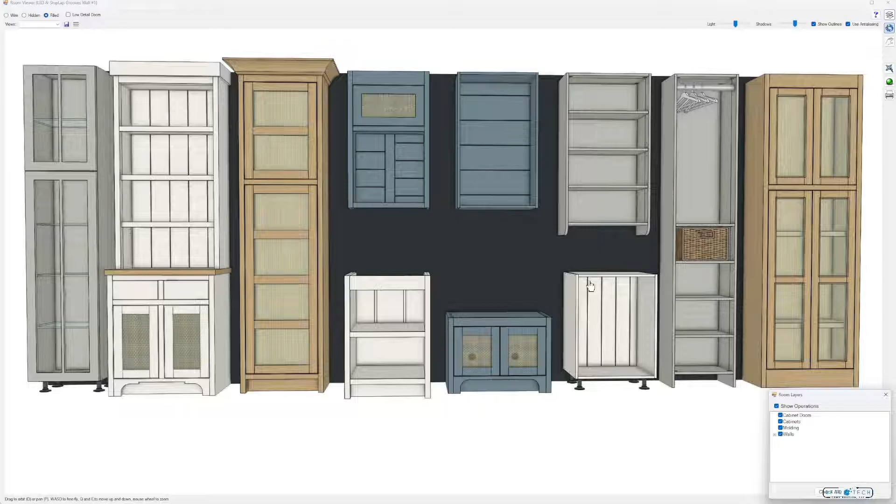So after downloading it, you want to make a copy of it and you'll want to save it into your insert library. So retro LED and Shiplap, and here you'll be. It's a pretty extensive library covering most situations you'll come across. This library is essentially broken into two categories. FF is face frame and the bottom FL will be the frameless.

So let's say you want to put a LED light in the side of a frameless wall cabinet. Let's say you want to do both sides, frameless wall LED sides. This picture is a little bit tough to see, but if you go to the wall LED right, there's your right side and your left side. The grooves in this library have dado logic applied.

So whatever the width of the down shear bit is, it'll go past that a half of the diameter. So if it's a 1/2 inch down shear making your groove, it'll go past a 1/4 inch. So it's not just going to butt in and leave a round edge for your shiplap and your LED lights. And I would recommend test fitting, maybe do a test cabinet.

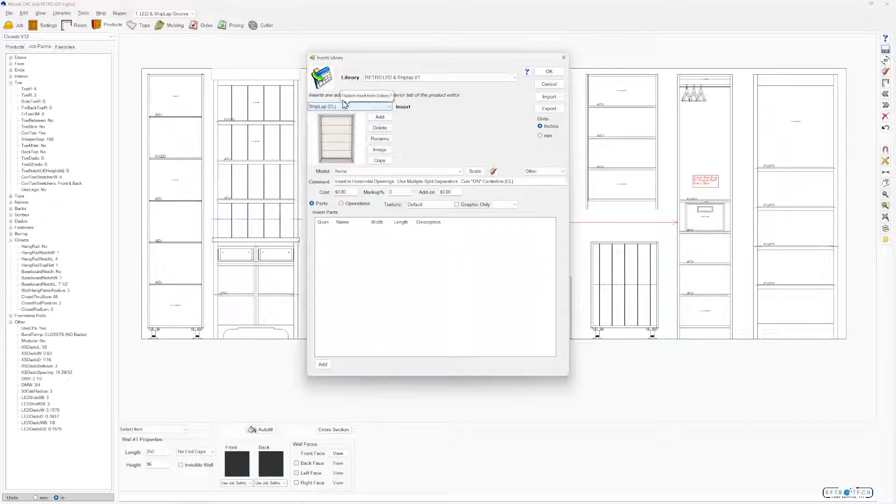Another point I want to get across right away is the use of separators for these inserts and how they're used. So this Shiplap CL would stand for Shiplap center line. To create this look, if you go into your interior, this top right box, it's a section split. So you can split it as many ways as you want and go down to a separator.

If I divide this into 1, 2, 3, 4, 5 sections and add this insert, it'll stick the insert to the center of that separator for this center line. And that's on a formula, so that is the exact center. If you go to the mid, it's going to go and put that operation in the middle of the separator. So essentially, it'll leave the ends with a 1/2 of a space for the shiplap mid.

That's also the same for the verticals. So the verticals are basically like a nickel gap back. The mid would have a 1/2 space, whereas the center line would have a full space. A couple more things here.

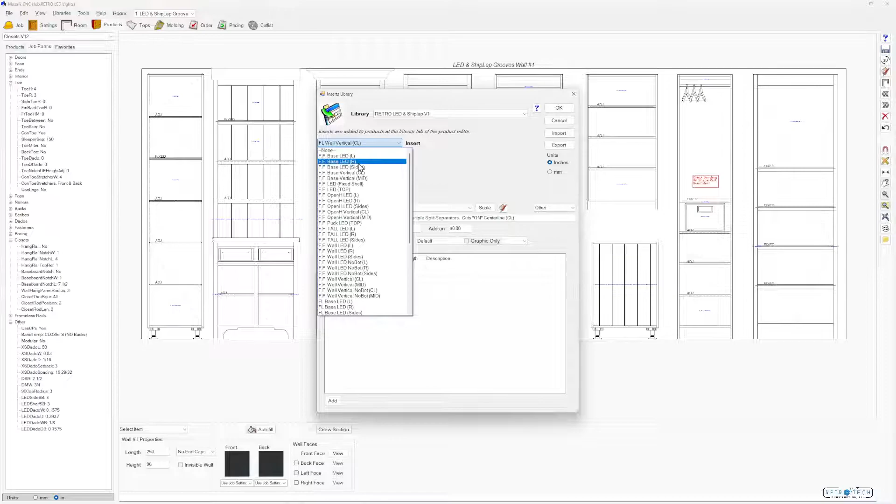So here's a face frame base right. There's a comment for all these. It says insert in bottom right opening. If you go to a sides, insert in bottom opening, it cuts both left and right grooves. In general, everything will essentially be put in on the bottom and left. Most things are working from the left to the right and from the bottom to the top. So that's just something to keep in mind.

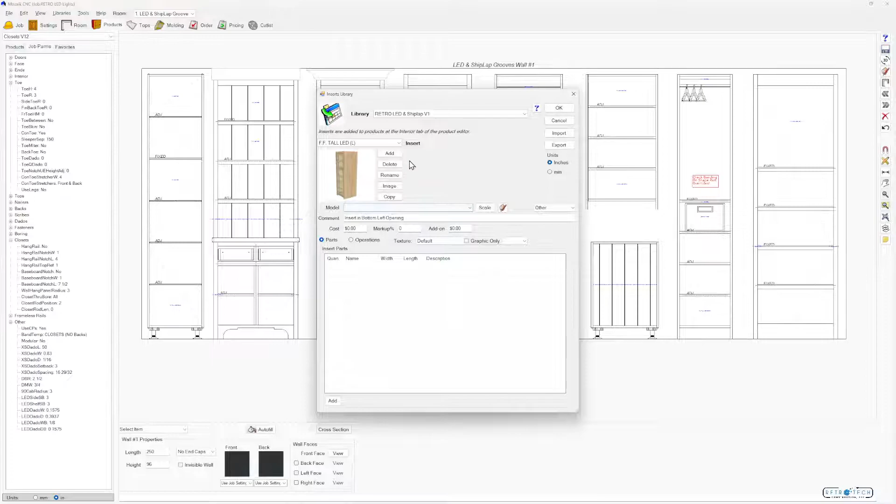The open height ones, it'll cut just the opening height. It won't cut the whole cabinet height. There's a frameless puck light. That'll be centered. LED fixed shelves. This does not work for the adjustable shelves.

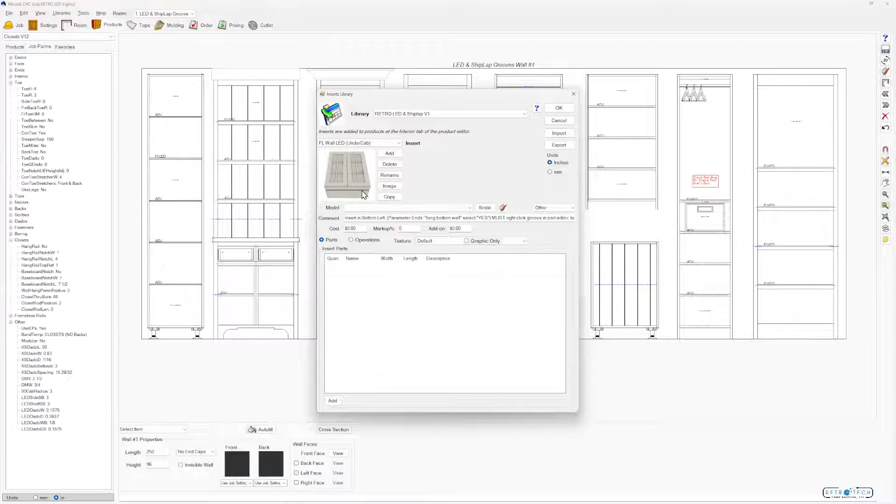LED top. One more quick thing I'll mention is you can use this insert to make the operation on the outside of the cabinet. I don't recommend doing it, but add the insert, go into your part, right click on the groove, and then it'll say move to opposite face.

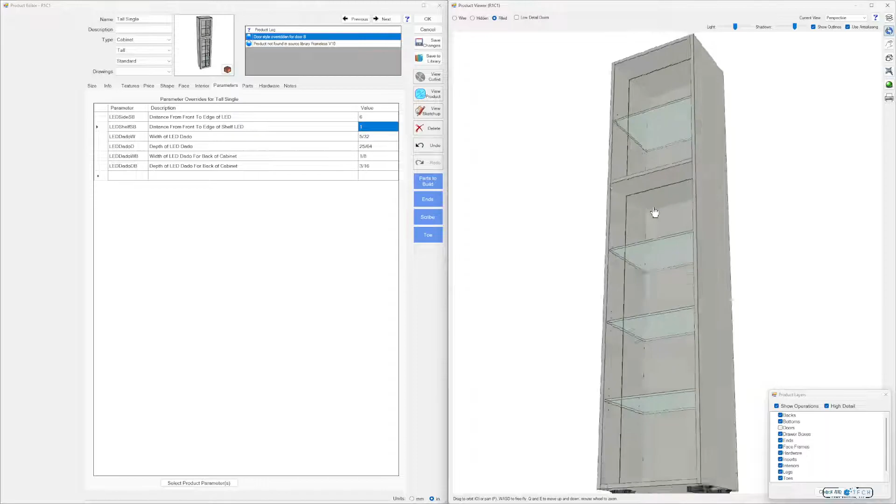So let's see how this thing works and how it's parametric. So here's a tall cabinet, frameless, that's got grooves in the sides, top, fixed shelf. And what if I want to change this from a 3-inch setback to let's just say 6? Everything moves. Pretty sweet.

Here I'm in my frameless blind dado construction method. And to make this work, you'll need to add these 6 parameters. The important part is filling this part in. The description doesn't matter so much. So how you do that is go down to add. And from there, you're just going to write in these names. So LED side setback.

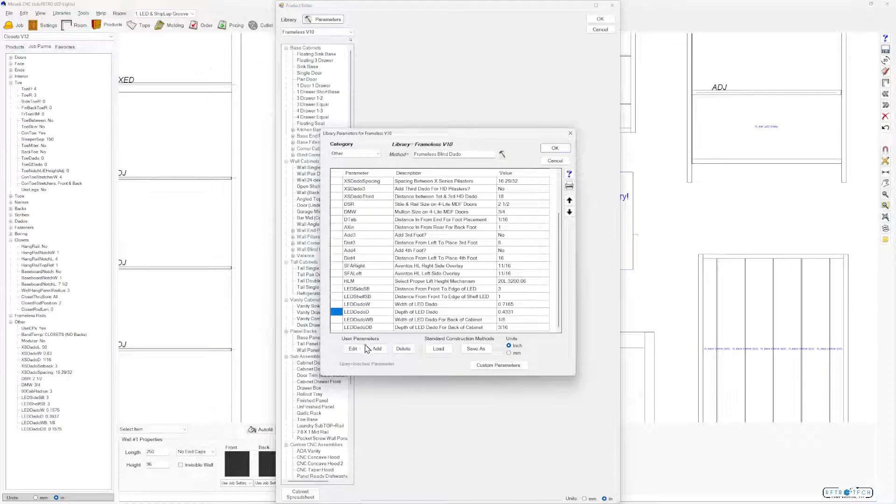Once you fill those in, press save as. It'll ask you to save it. Yes. And then you can just overwrite the same construction method that you just were using. And don't worry, you can edit these or delete these if you make a mistake. So don't worry about that too much.

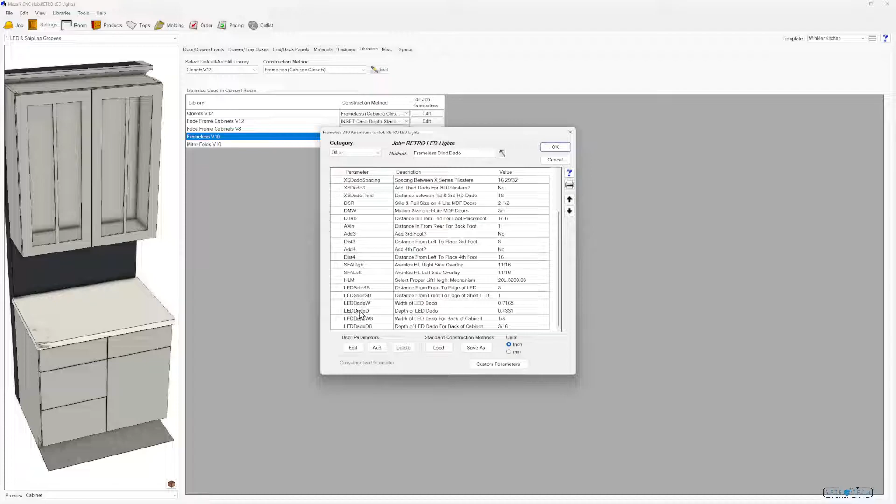So then you would ideally start a new job with that construction method, and those would all be in your other category. You could also go to your settings in a current job, go to your libraries. You could go to that construction method you just modified and go to edit job parameters, and from there it'll show these here once you load them. So you'd have to go load and then grab that frameless blind dado and open that up. That would show up there then.

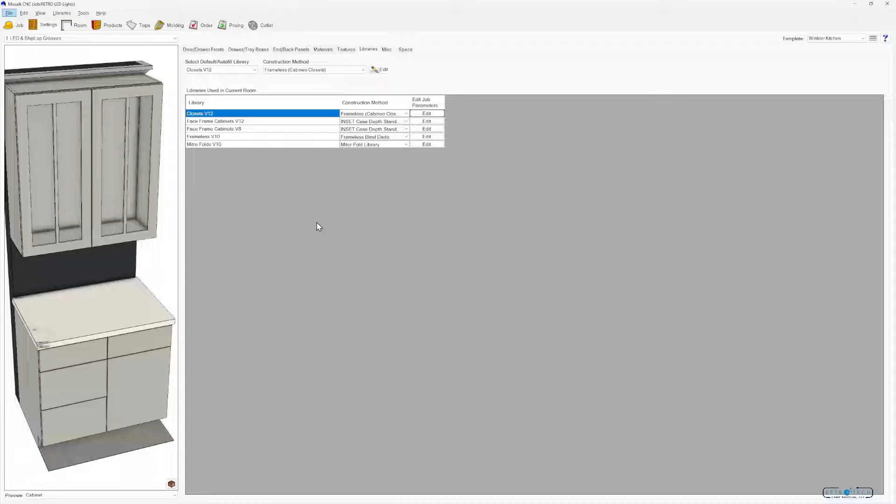This part can always be a little bit of a mystery with what are you loading and what is current, but edit and load and that'll pull that in. So that's how that works. Show you how to copy this. Let's say you have your frameless V10 library changed and you want the frameless V12 with the same user parameters.

You can go into your frameless V12 and it won't have these yet because you haven't added them to this library. But if you want to use the same method, you can go ahead and just press load and then go to your frameless blind dado and open. And it'll say overwrite current parameters. You say yes, and it'll bring in the one you just saved from your V10 library. So that's how simple that is, to just kind of copy it among libraries.

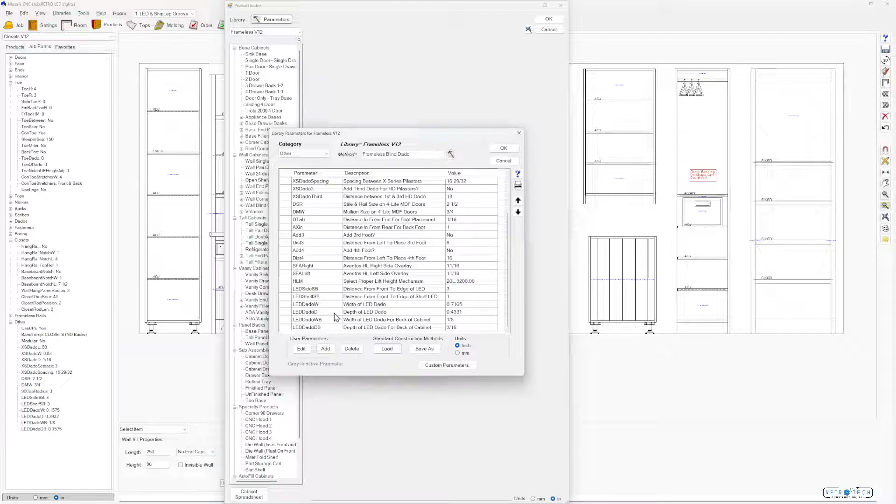So here's a tall cabinet that I have a groove in the top. So that's an open height. What if I don't want the top? I want the whole cabinet. Let's clear that. Go to our inserts. And I'm in my face frame cabinets here and a tall. So let's go to FF, go down to tall. Let's go sides. We'll drag that in, the bottom. Let's go all the way up to the top. So let's say I don't want that.

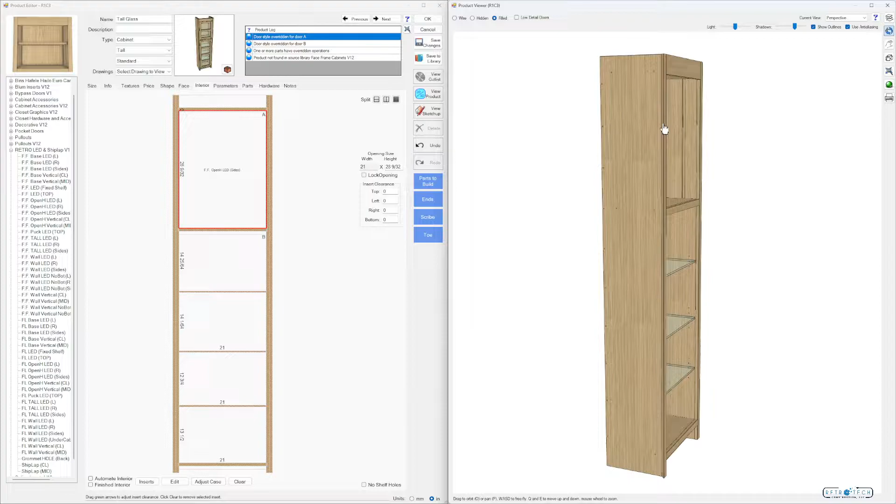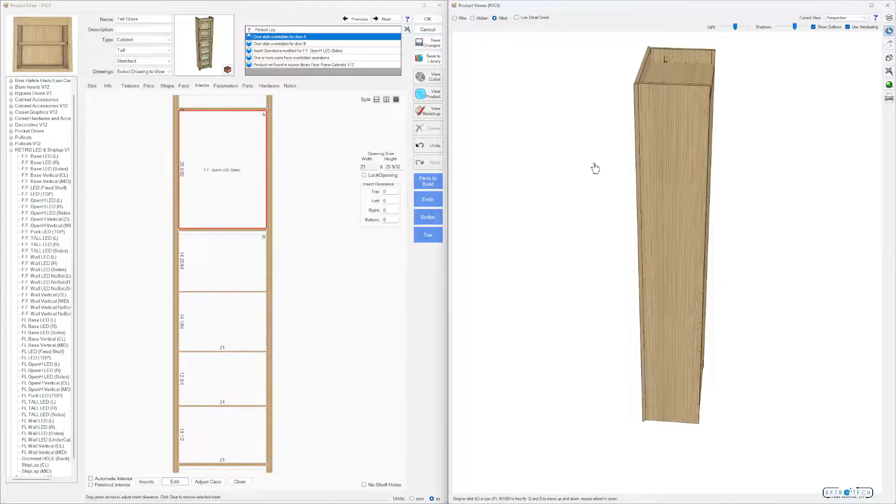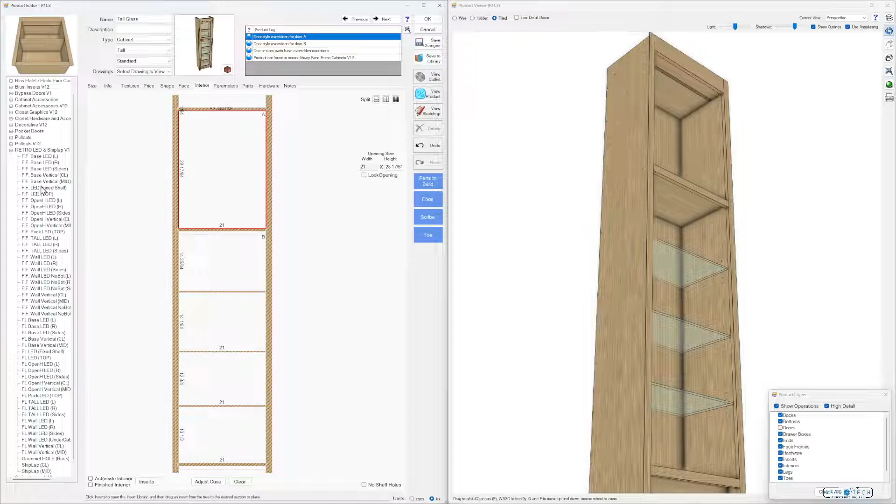Now what if I need a groove in the top and the sides? What do I do here? Well, that's the beauty of Mozaik and using separators. So let's clear this opening again. What we'll do for this, there's probably a couple ways you could do it, but we'll just split this for now, make it a separator. Here we'll open our library again. We'll go to face frame and we'll go to LED top, drag that in. There you go. What we'll do here now is you can make this top, and then now we'll go to our sides and I can just add the same thing we did before. We'll go to our face frame, open height, sides. Now we got the best of both worlds.

One little side tip here is these glass shelves. If you don't know how to add glass shelves, go to your shelf and you can see here it says adjustable shelf, 3/8 glass. Go to edit, it says glass here. So I already changed this, but let me go back and I'm going to rebuild this shelf. Go down to rebuild. There it's my regular rift white oak. Let's go to edit, go to part type, glass. And as long as you have that material set as a glass, that'll pull up as glass.

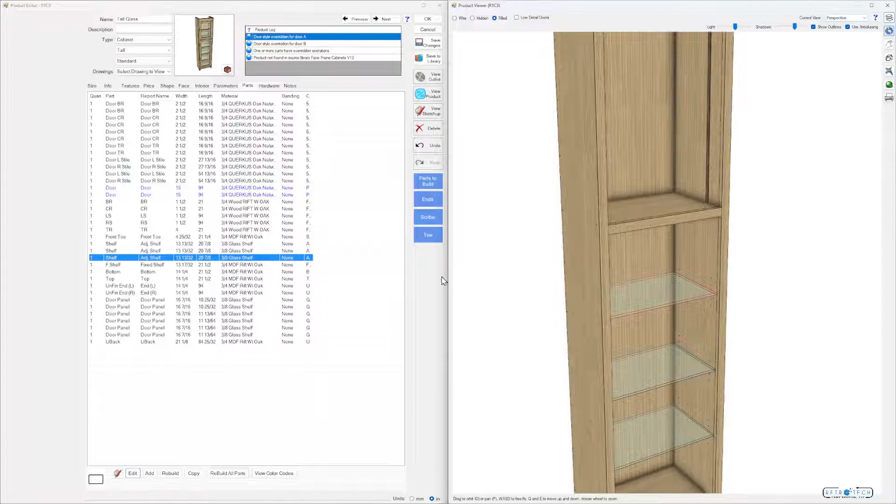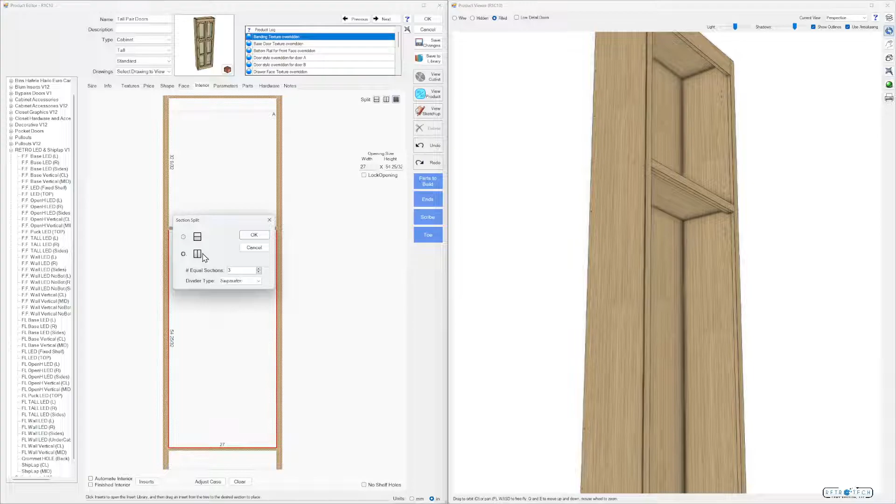So let's look at how we'd add LED side lights to this cabinet in the lower section and a puck light in the top. Let's clear this out. I have to go to my open height first. And before I can do that, I have to split this. So what I'll do is split this in 3 ways. Vertically, the separator. And now what we can do is go to face frame, open height, because I want to get this opening height with a groove, and we'll go left and drag that in. Do the same thing on the right side, drag that in.

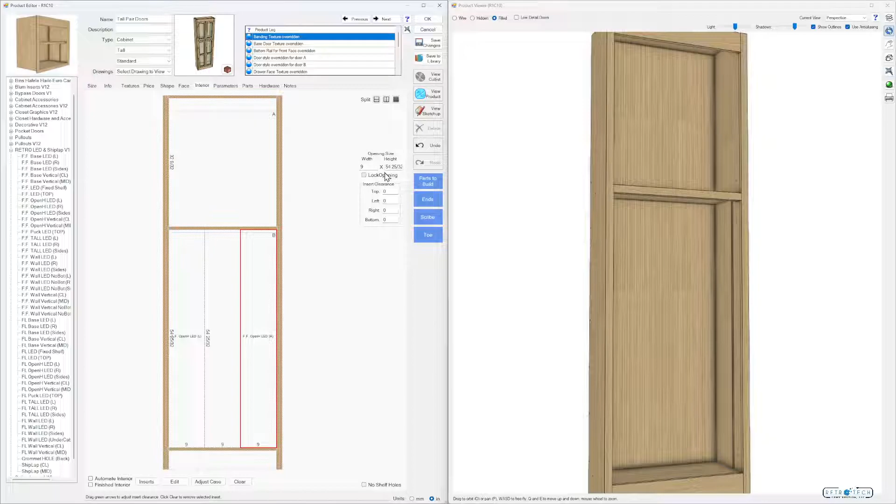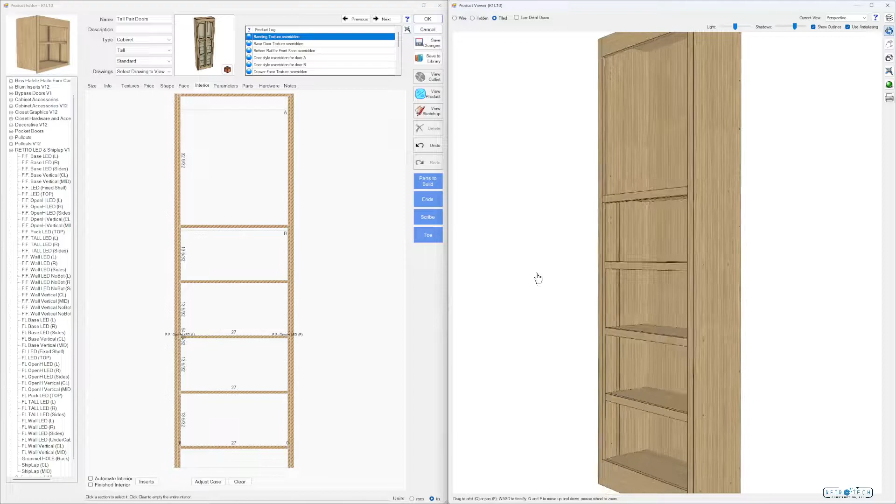Now we're just going to squish those to 0. There you go. Now we'll add our shelves again. There you go. Still parametric. Can make these adjustable shelves. Still works. And then the top, we can just simply add a puck light. Go to face frame, drag that in.

Puck lights are a little different. They require a few manual edits, but pretty simple. Check your diameter here. It's already going to be centered, and the inset's going to be centered in the inside of the cabinet.

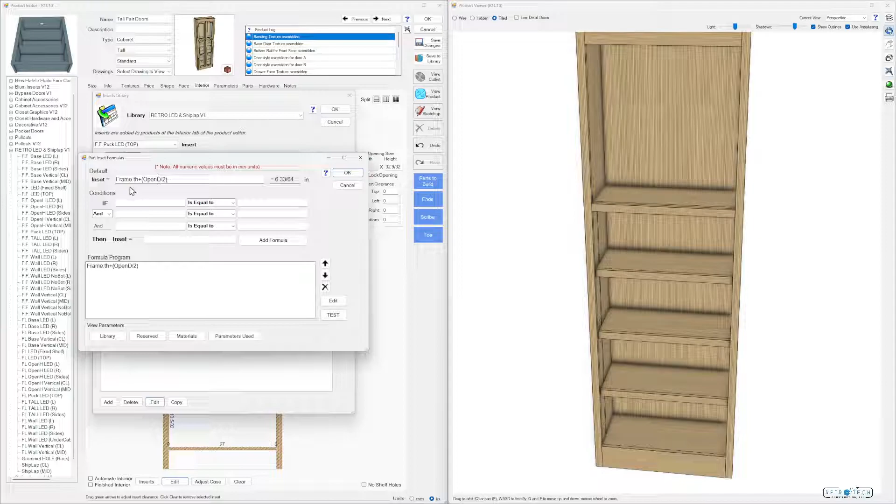So how do I get grooves in a base cabinet like this with the middle partition, or even two grooves? Let's figure it out. And for this, I'm just going to run a partition in the middle and lock it to center.

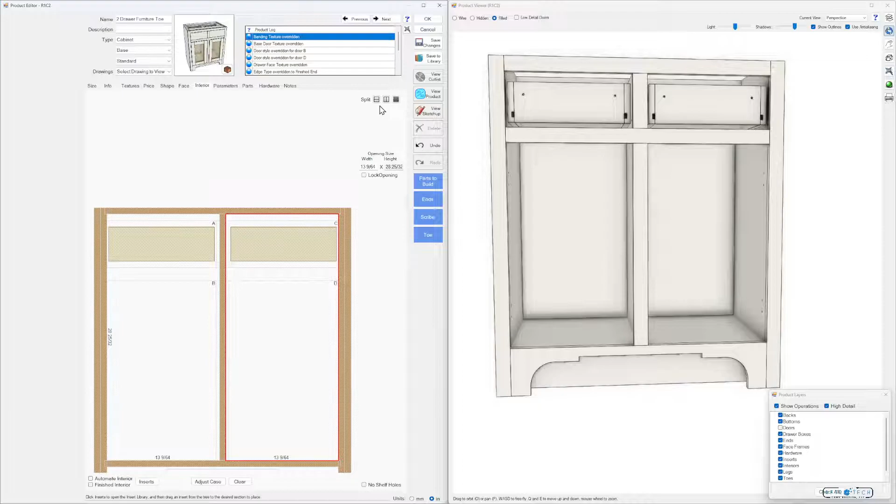And I'm going to add a stretcher, lock it to the center. Could be a separator if you want. There we go. So now, let's just say I put a shelf in there. I could do a couple things here. I could add an insert, face frame, base. Let's just try this once.

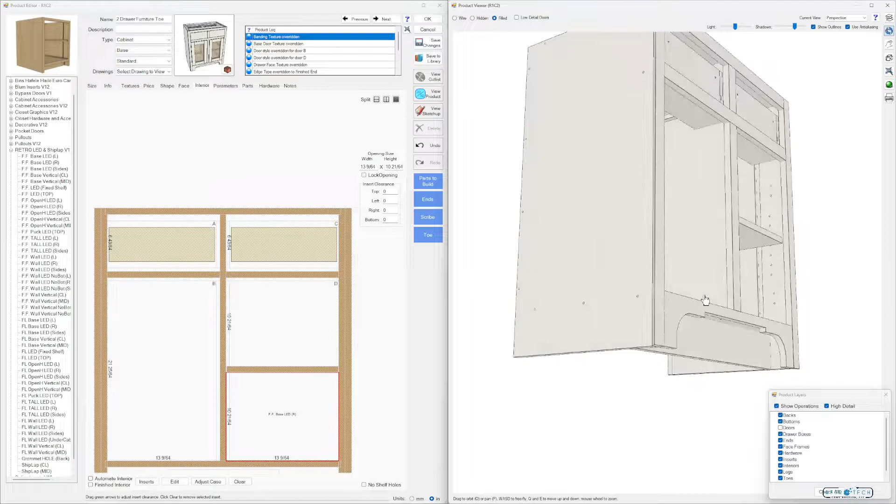I'll show you. That one will go all the way to the top. So if I drag that in, it'll go up through all the way to the top. It might be fine, but let's try something different. I can't do an opening height here because it'll stop at the shelf. So let's delete the shelf.

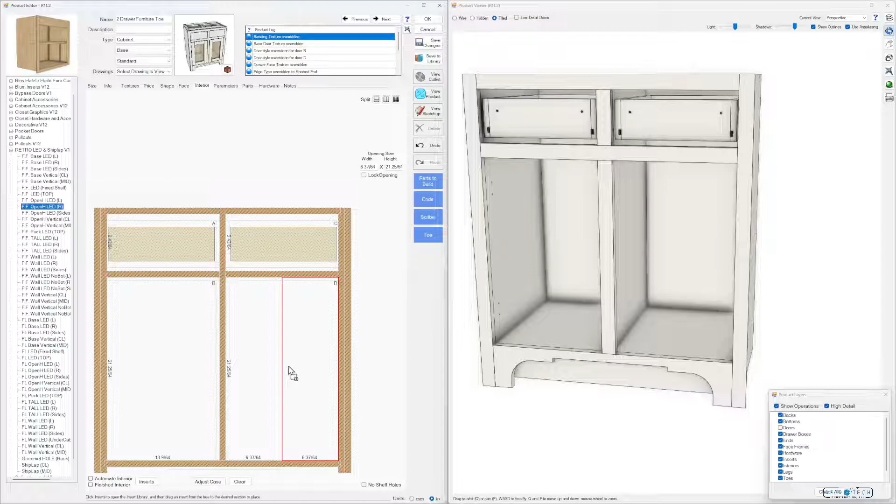What we'll do here is we'll split this again. Separator. Now we'll add our face frame open height LED right. See what we're doing there? Let's go to the top of that opening and stop. Then again, we'll just go ahead and make this width 0. Still there. And now we got our shelf. That's all you got to do.

Putting grooves in cabinet backs is so fun now. It's so easy. So let's take a look at how we do it here. Here's a frameless base. So we're going down to FL, base, and I got vertical centerline, or I got vertical mid. And in this cabinet now I have vertical mid, which means the actual operations are going in the middle of the openings. So you can see the separator is right here, but the groove is here.

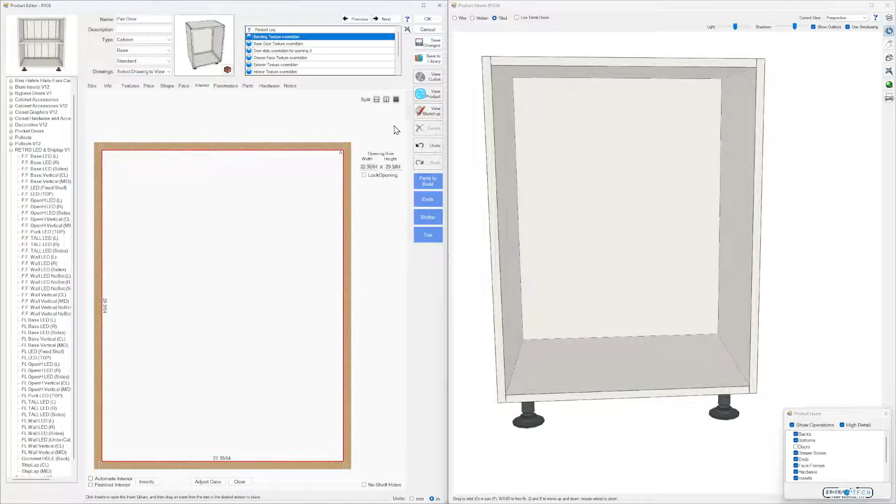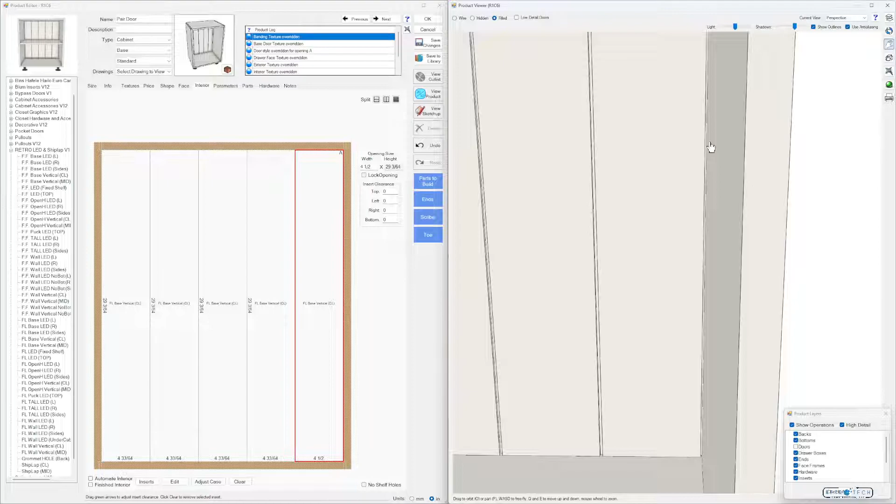So let's clear this and just do it again. Let's try the center line. Just going to go right in the center of that line. Drag it to the left side and drop it in. And there, that's it. I don't want to drag one in the last opening, because what would happen is I would get an operation halfway on the end of that part. So we don't need one there. So we're just going to take that one off. And that's perfect right there.

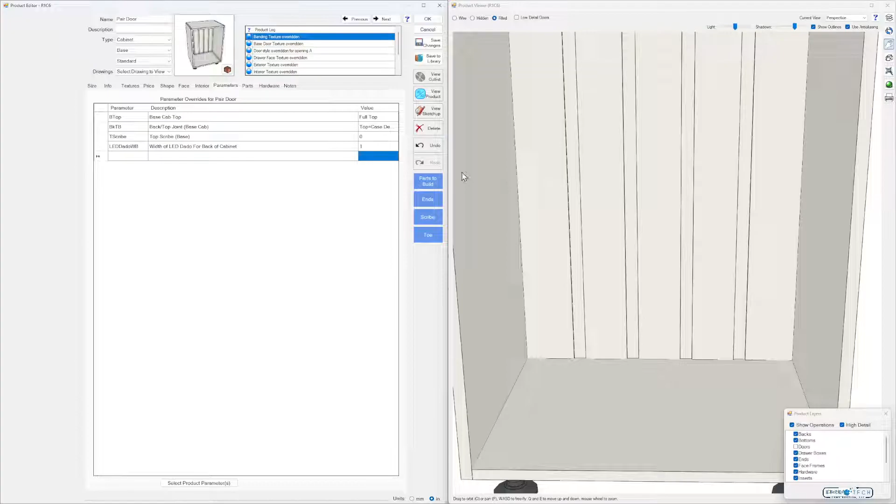So this is parametrically set up to split that line by whatever our back parameter is. So let's drag those in here. Let's just go to the back width. Let's just make it an inch. I'll show you the difference between the center line and the mid vertical. For the mid, we'll use all the openings, and that splits the last one in half. So there you go. Pretty cool.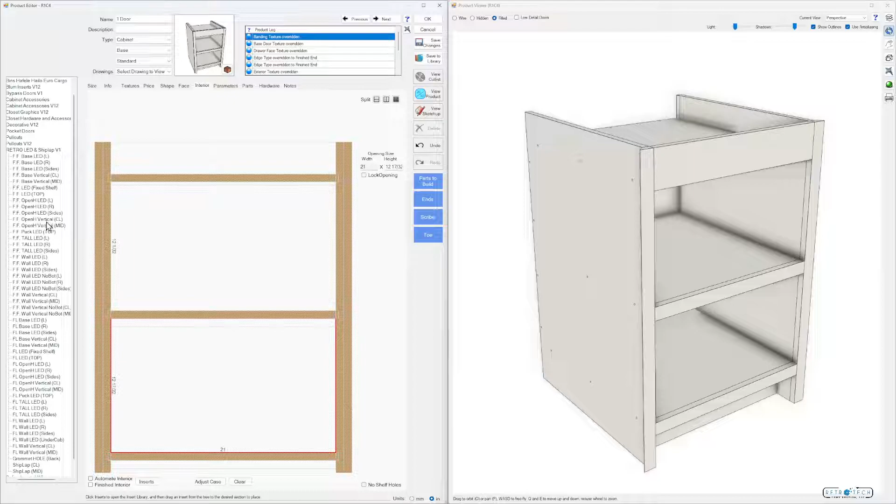Vertical, just do one, so you can see. You drop one in there, it puts a groove in the middle. Let's back up. We'll split this 3 ways just for ease, and we'll do face frame, vertical mid. There you go. Now if I take this shelf and drag it, oops, that has to go off the face.

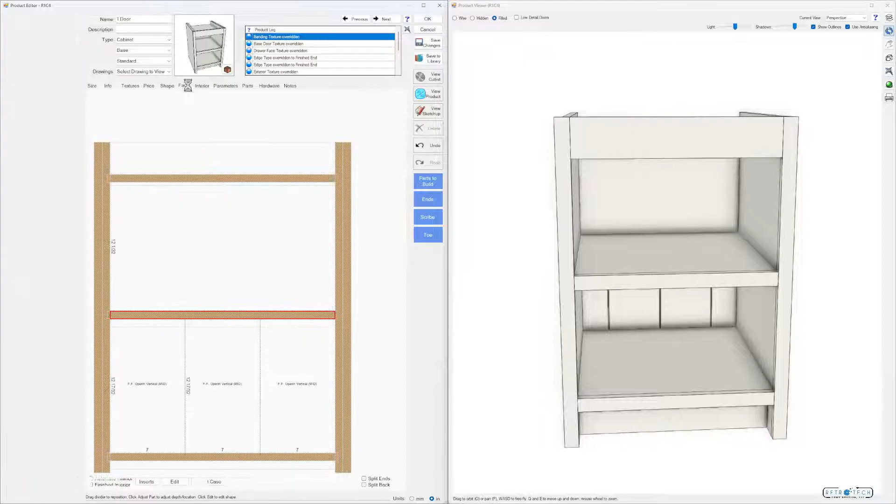That'll all move. Let's take a look at adding some horizontal grooves, or shiplap grooves. So here you go. We got the mids here. So we have 1, 2, 3, 4, 5 openings. And actually with the mids, we have 1, 2, 3, 4, 5, 6 panels. So that's one way of doing it. You could also go to the center line.

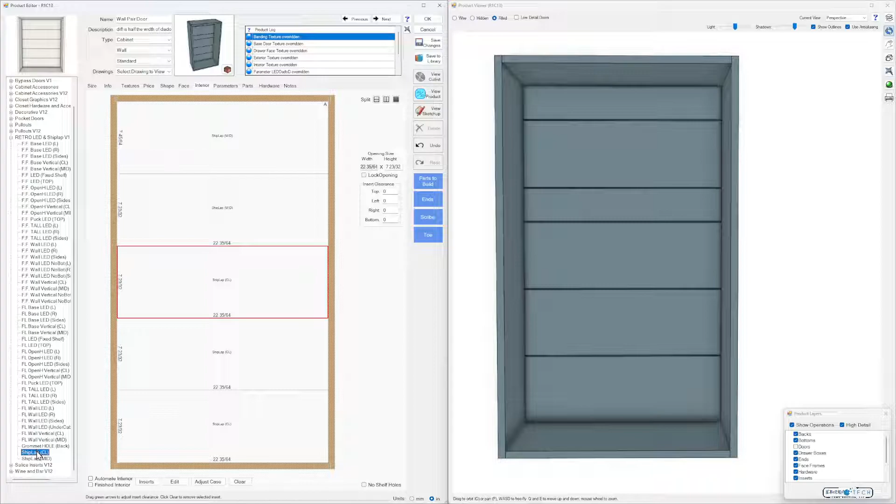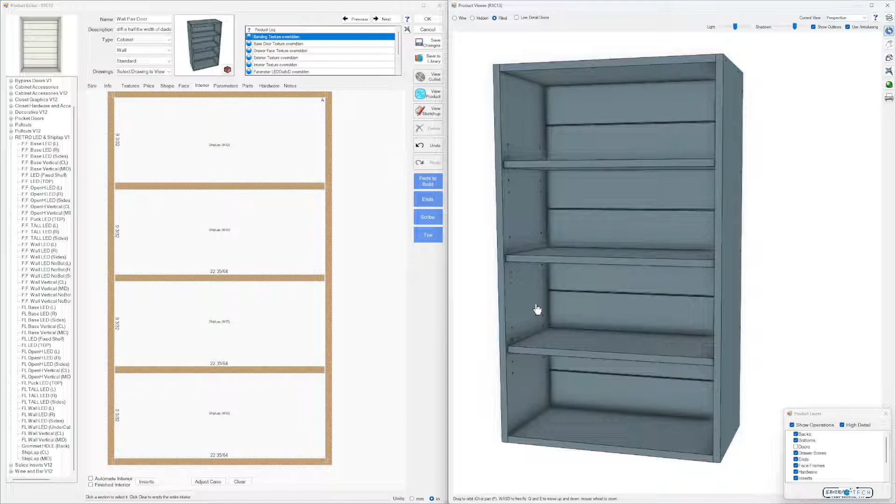And then this one, just delete it or clear it. There's the center line. Another thing we could do is we could just add some shelves. Let's do some fixed shelves. That's just splitting the opening in half. And there you go. And there, you can do the same thing for the adjustable shelves.

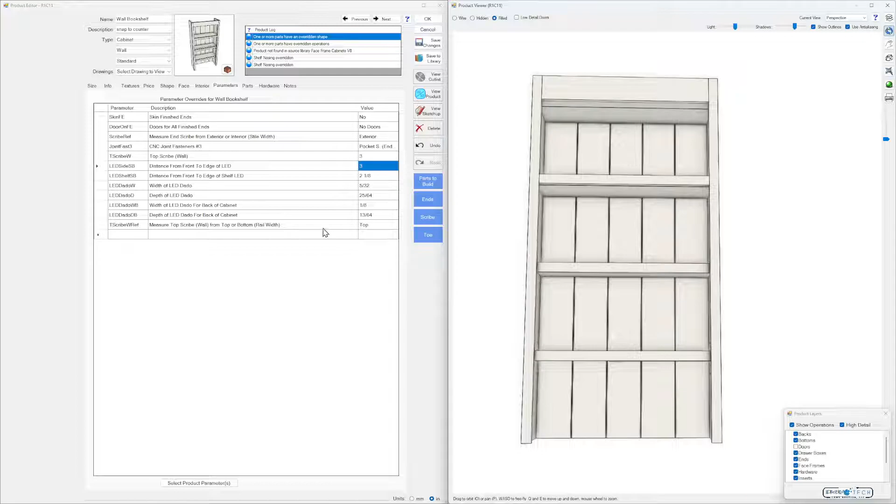So let's look at a cool wall cabinet like this that has no bottom. One thing I want to point out also is on back operations, the top scribe wall reference needs to be on the top. So you'll see here, top scribe wall, I have 3 inches. Go to 0. That's all parametric. Everything works fine. Let's go back down to 3. Everything's fine. So if I go to bottom versus top, you can see what happens here.

Otherwise your operations will be like this, or it'll be off the back of the part. So if I go to top scribe 0, it'll say off the back of the part. So you can't see it, but if you go into your parts operations, you'll see there that's not right. So just one thing to kind of keep in mind when you're working with this.

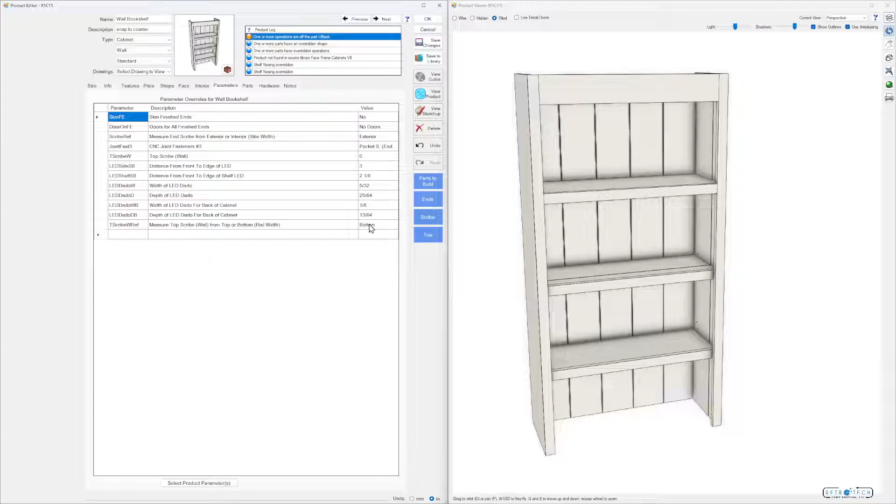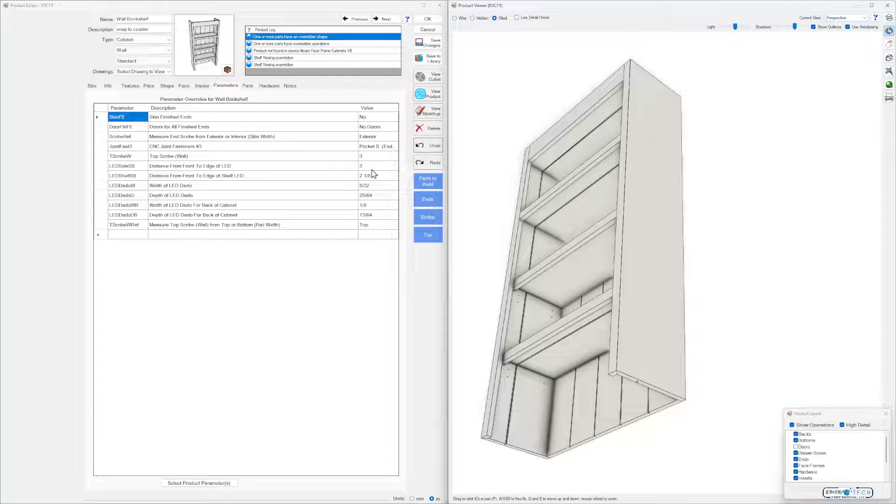So this is a pretty cool cabinet here that's got operations on the bottom of fixed shelves, adjustable shelves, the top of adjustable shelves, sides, and the back grooves. How do you do all this in one cabinet? Let's take a look at it. I'm going to change the setback here. So instead of 3, let's go to 6 so you can see everything changes except for the adjustable shelves there.

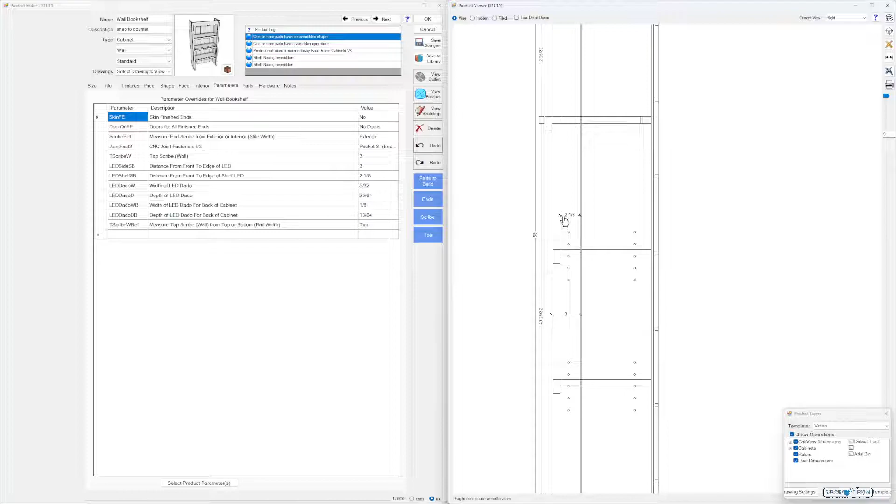So that's why I have 2 different parameters here, so we can dial that in, tweak that. So you can see there how they're lined up correctly, top groove and a bottom groove. What it's measuring from, it's 3 inches from the front of the case, and it's 2 1/8 from the front of the shelf. So this can be kind of a complicated cabinet to assemble if you're newer to Mozaik or to draw. So you can do this by deleting the bottom.

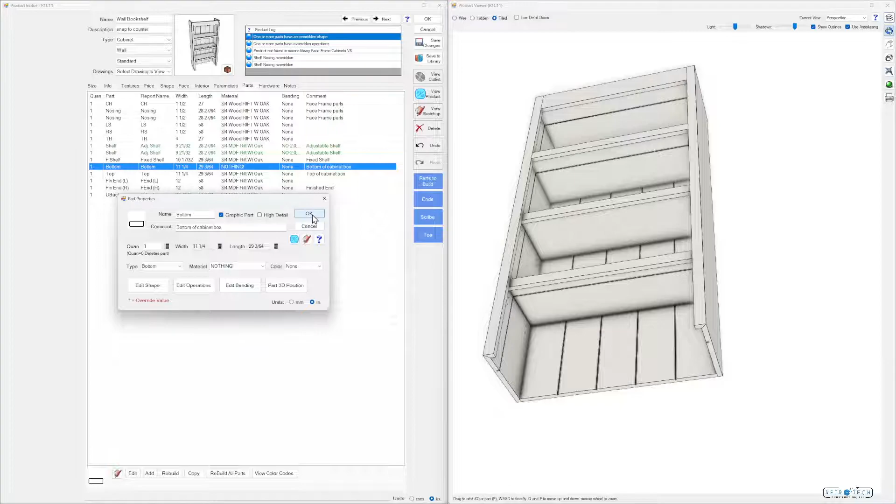Going to the bottom part and deleting this. But you can see here what I have instead is I've created a material that's nothing. It's basically a material that has 0 thickness. And I've found this works better for me for this situation. When I add my grooves, it'll go all the way to the bottom.

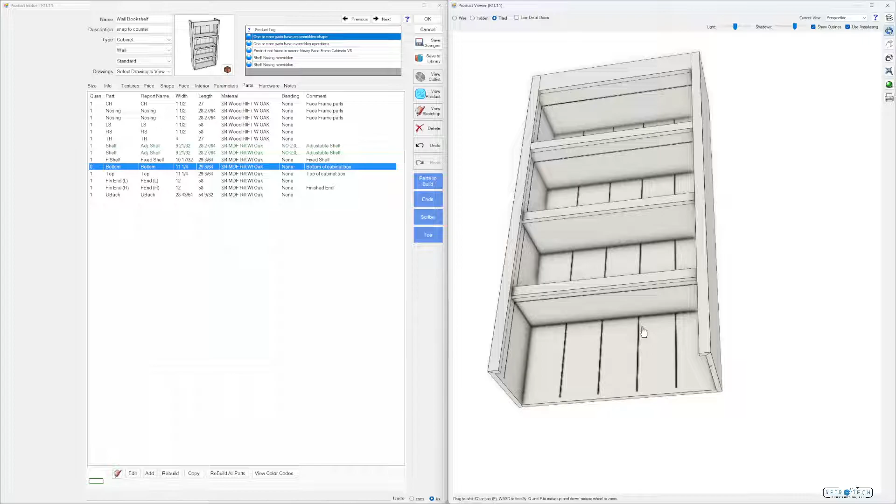If I have a regular bottom panel, let's just say I have it on there and I delete this, my grooves don't go to the bottom. I'm kind of just tricking the software into thinking that there's a bottom there, so it's taking the grooves all the way down. Another thing you might notice is I have 2 green shelves here. Well, the insert library won't stick to adjustable shelves. So those are shape overrides, which come with the download.

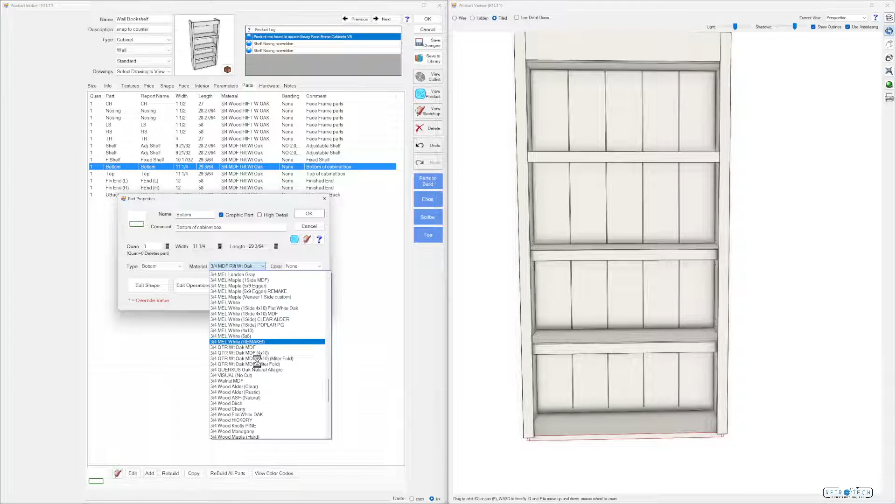Let's just rebuild all parts here, the bottom. There you go. Grab our material, that's a nothing. And that works fine. What we'll do is we'll clear this all out. All right, that's done. Let's just say I didn't want any grooves in the back. I could easily add the lights by just dragging this in. And there I have my lights on both sides. It's done. The problem with that is I now have used up my opening space with this insert.

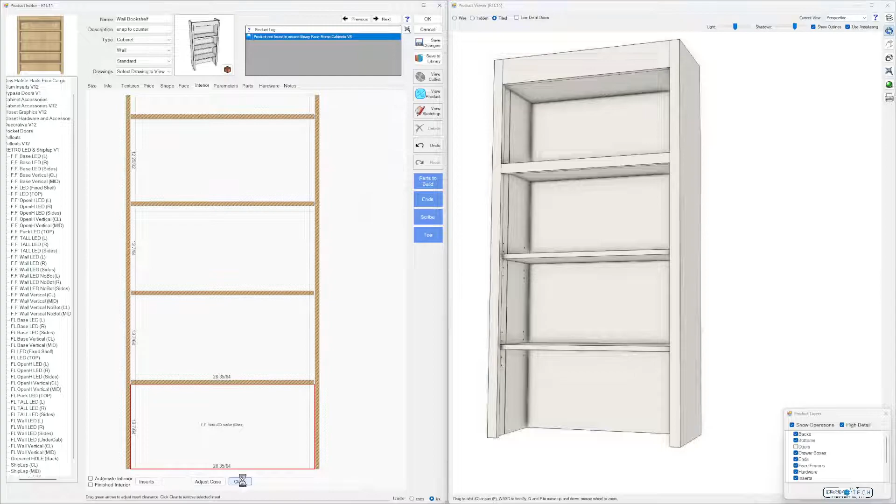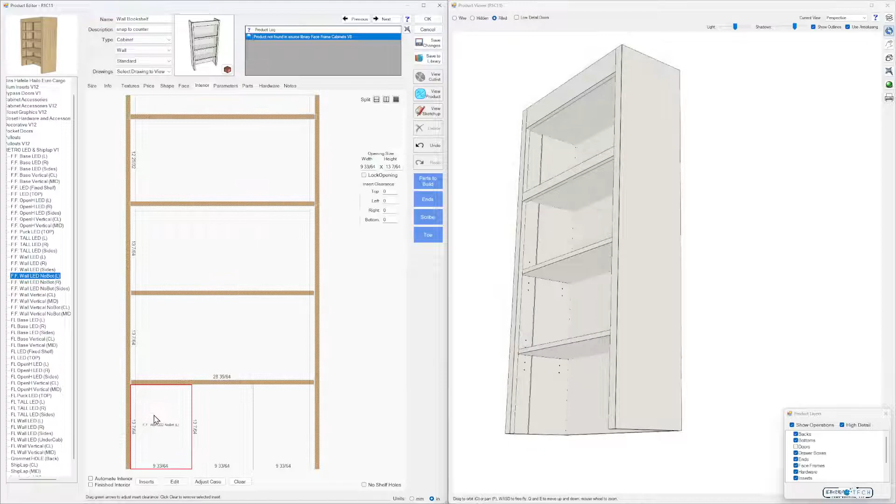So let's clear this out and do this again. We'll split this in 3 ways, 3 separators. And Mozaik's going to help you out by changing that to a fixed shelf. So you say thank you, and then we undo it. And now we go back here to where we have our face frame, LED, no bottom, left. See the picture there? The cabinet has no bottom. And then we'll do one on the right side.

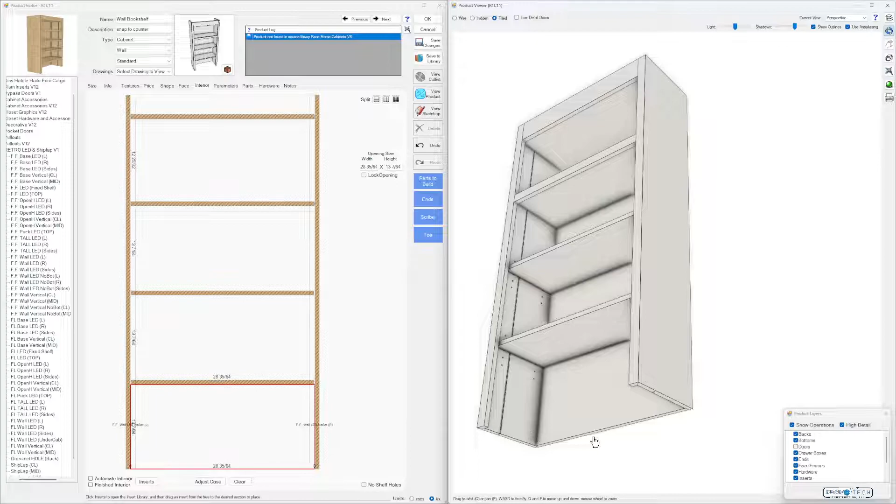And again, we'll just go ahead and shrink these openings to 0. And there, we're done. Now we got all of our usable space back here. These grooves do have dado logic going all the way through the bottom here and on the back. I've tested this. What we'll do here is we'll split this into, let's say, 5 sections. And we will add our face frame vertical, no bottom. We can either do center lines or mids. For this, let's go with the mid. So for the mids, we'll do all sections.

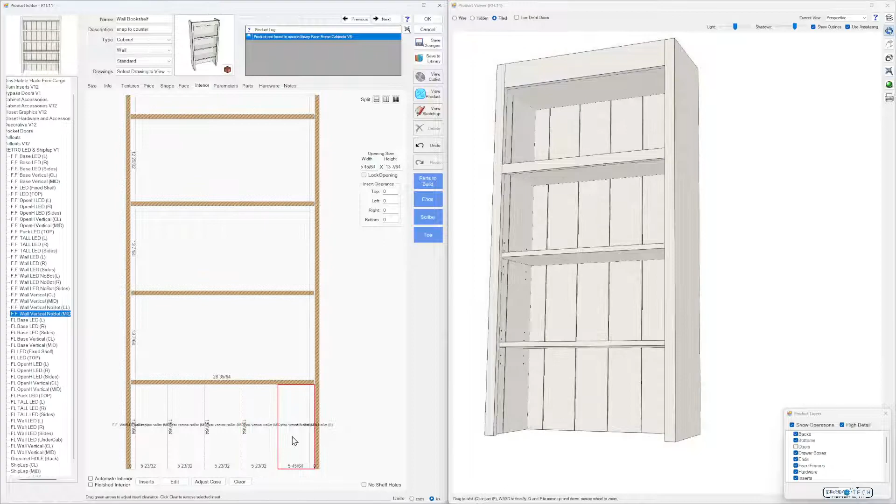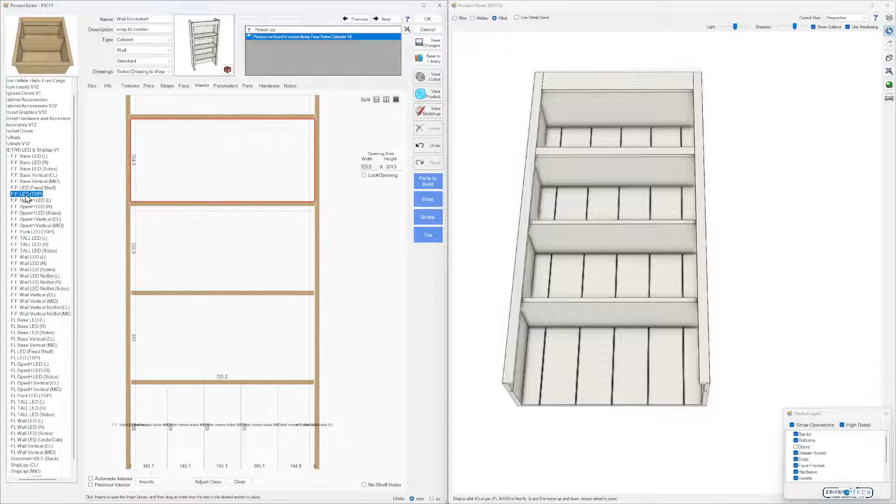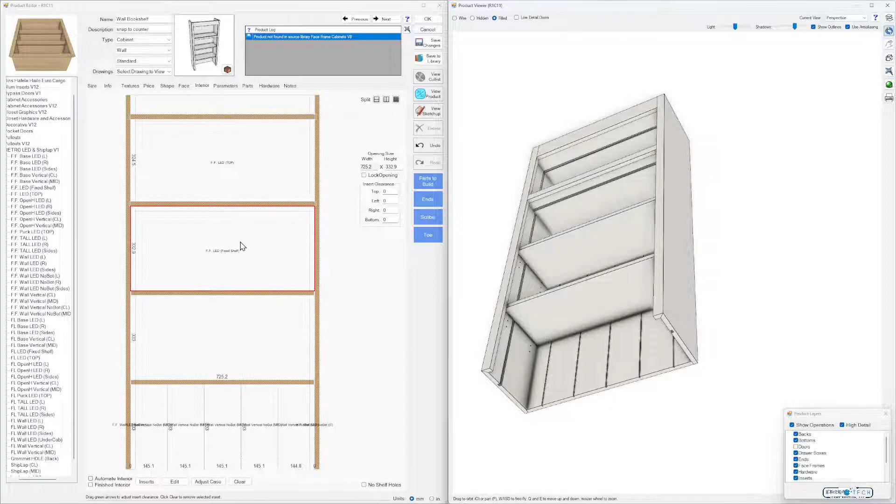There, we're done. Keep in mind now, we can adjust these dados independently of the back. So let's just go ahead and make this 12 mil wide. And now we'll go back into our interior and let's add face frame LED top. Drag one in there. And we can do a top on this fixed shelf as well. The difference is if we do a fixed shelf, the shelves are on a different parameter than the sides, than the rest of the library. So either way you want to do that, I'll just undo this. So it's pretty cool that Mozaik can now do nosings.

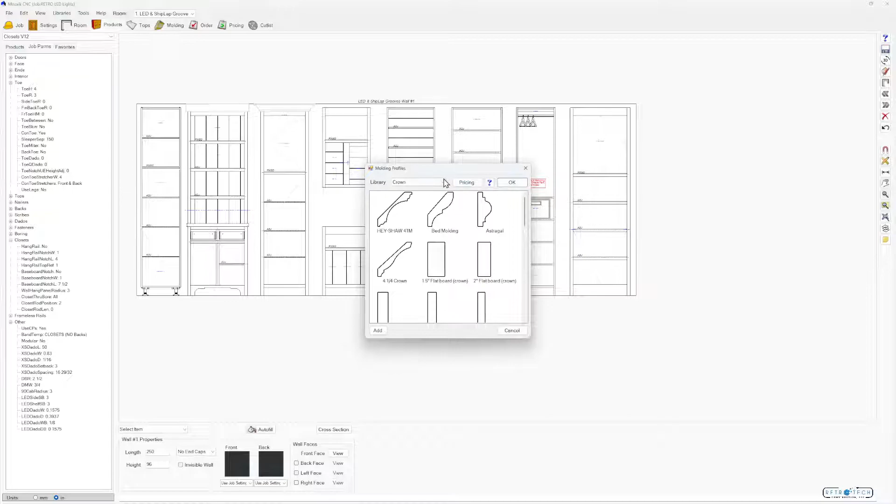To get the adjustable shelves to have grooves, well, when you download your library, it'll come with a small shape library, retro LED parts, and here you can add your adjustable shelf with a bottom light, a top light. So the shelves are on the shelf setback parameter, and these parts are on the standard side setback parameter. Two different types of things there.

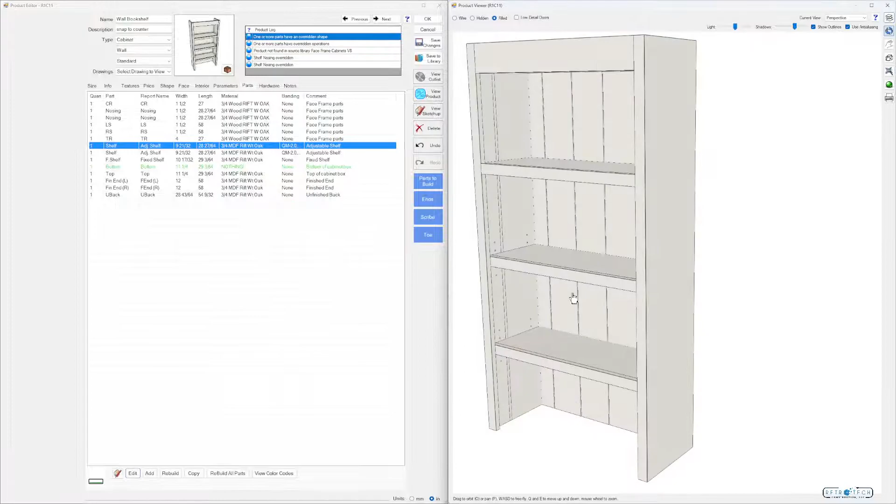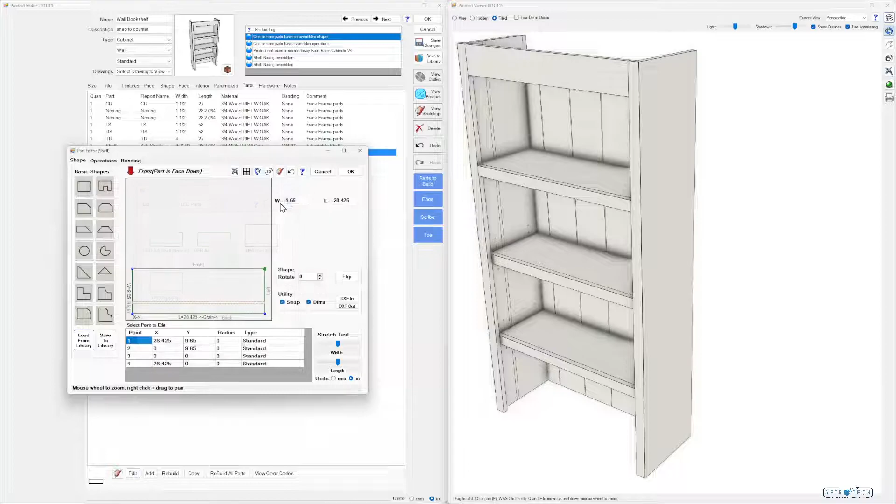Go to our parts, let's go to our shelves, let's go to our edit shape, load from library, go to your new library, retro LED part, and let's do a LED on the bottom here. Press OK. We'll go to high detail. High detail allows you to see the operation at all times. Pretty nice. The other shelf, let's put one on the top. So go here, edit shape, load from library, LED parts, adjustable shelf top. Okay. And there you go. These are parametric as well. So yeah, if you adjust the setback here, let's go to 5.

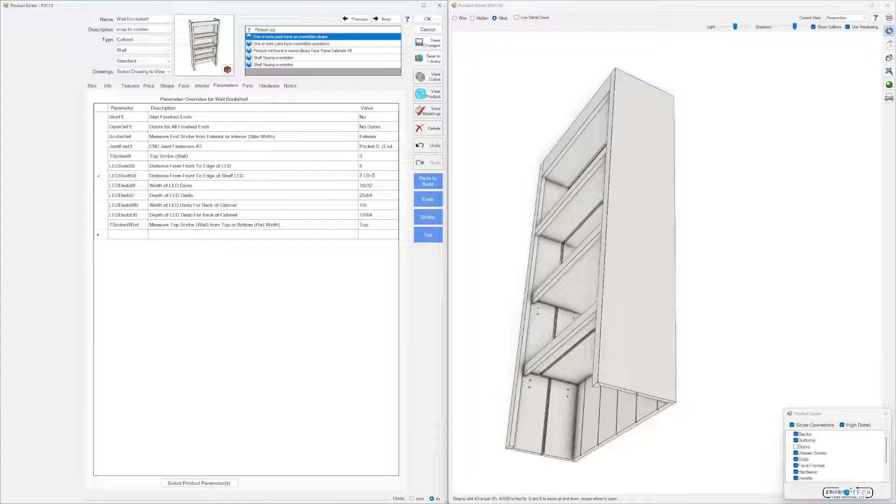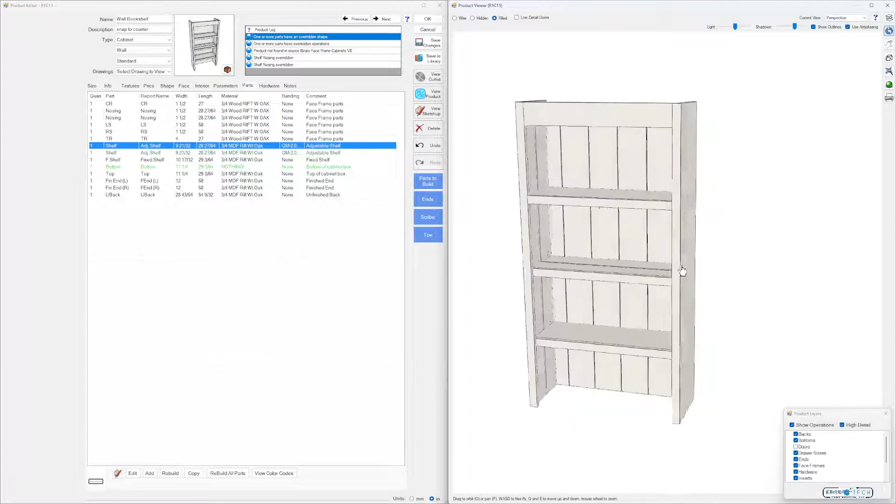Let's go to our fixed shelves now. Let's add 2 to that. There you go. That lines up the same. I will caution you with using the shape library to double check your banding after adding a shape to make sure it's what you want. And it'll stretch and shrink, but it will stay a square or a rectangle. It won't dado in, so just be aware of that.

Another thing I'm super excited about is this library works with the closet library. It's all parametric again. Toe height. It'll be adjusted to your toe height. Dado setbacks.

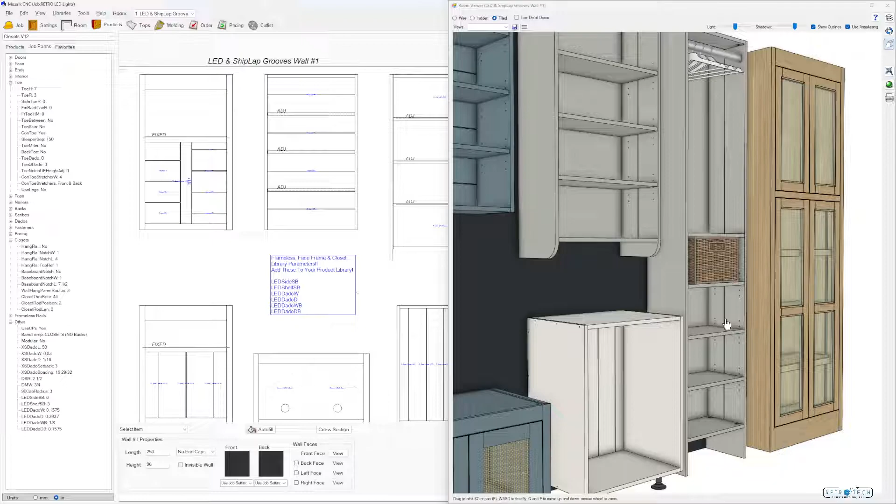That'll adjust. So here, let's add a groove in the top of this wall cabinet. And for the closet library, when you select this cabinet, it won't grab the end panels. It behaves a little differently than the regular libraries. So we'll open this up.

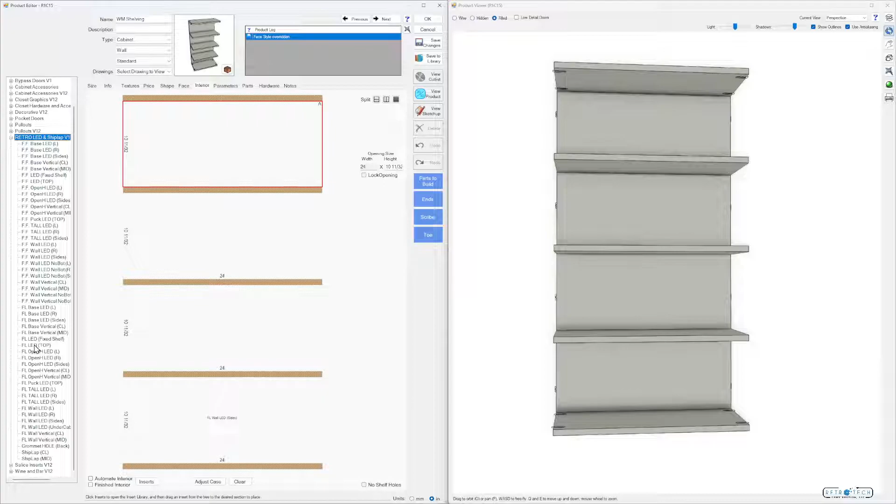So I want to add a light to the top of this. Again, we're going to use the frameless library for this. So we'll go to frameless, LED, top. And there it is. See, it doesn't work for the adjustable shelves. So if we want that in the parts, like before, just go to your edit shape, load from library.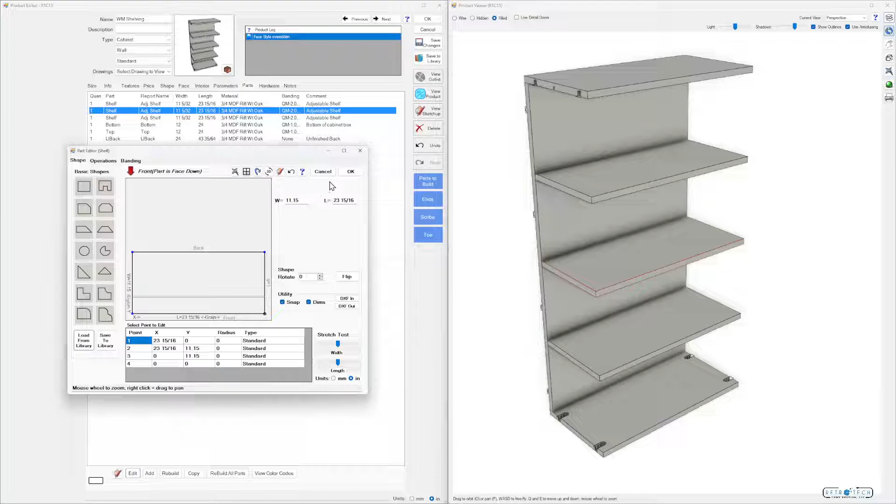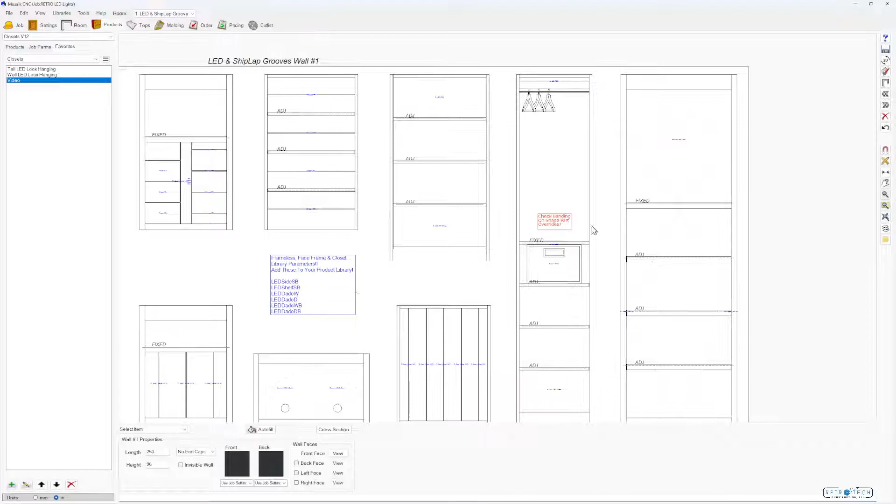One thing to note is you can save these as a favorite. So I can take this whole section here, right click, go to add to favorites. If you have no categories yet, you can create one. I have a category of closets here, video. So I could drag that out into a room and it would be just the way I left it.

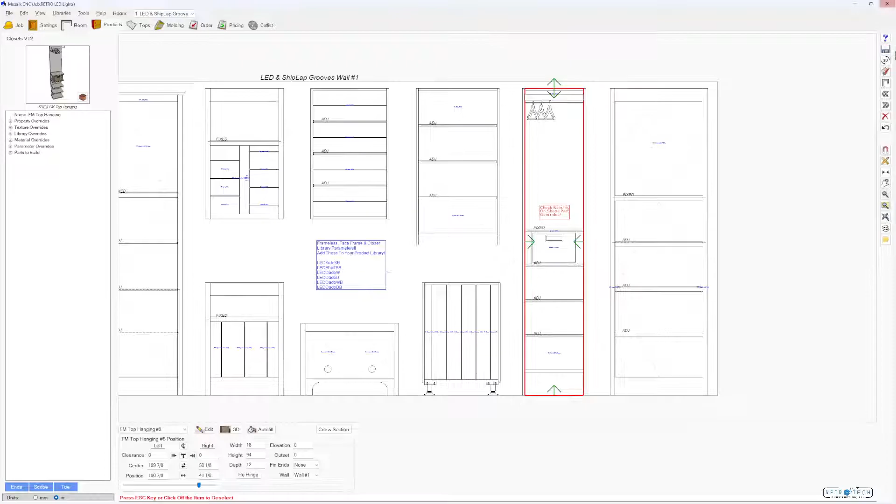Let's quickly take a look at this tall closet cabinet here. So you can see here I have a frameless tall LED sides. It's hard to see it there, but I have the grooves for the sides set up right now. Let's go back out to take a look at this. So within the tall section, these grooves come out the top. So if we don't want that, we just make it a base.

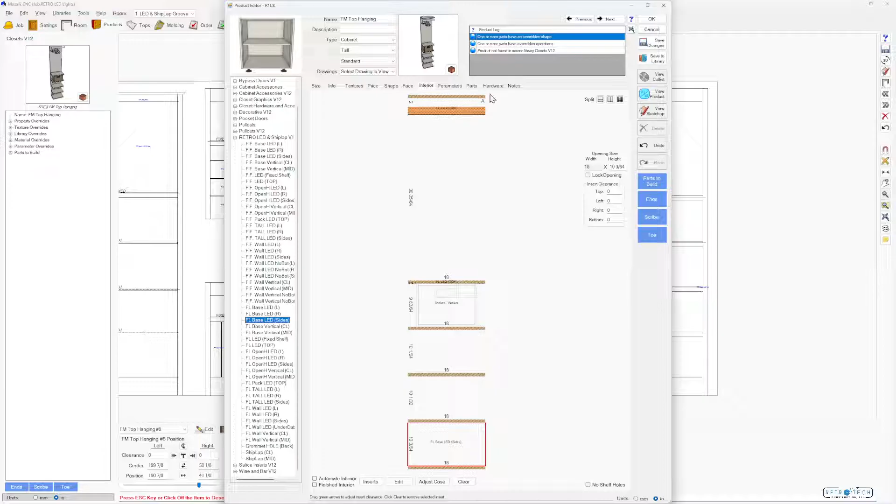So we go to the interior, inserts, we'd go to frameless, base, LED sides, and that's going to go up to the top, but again, it won't come out the top. I know this is getting long, but I want to show one more example of the complexity of inserts and this library. So here I have vertical and horizontal grooves in the back of this cabinet. It looks kind of complex here, but let's just show how this works.

Clear this out, we'll split this again with a fixed shelf, and we'll just lock it to the top. Now the first thing we're going to want to do again is split this thing multiple ways. We'll start with 3. We'll go to this opening and we're going to make this 9. Go to this one, make it 9. And now what do we do?

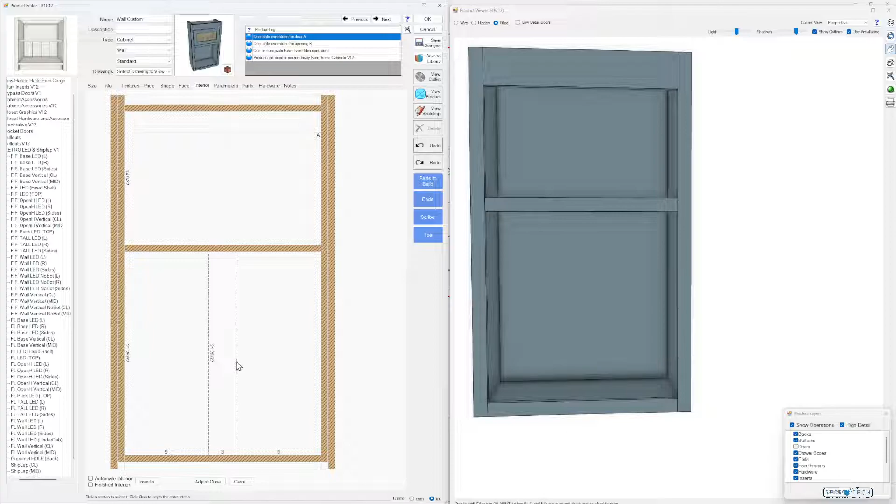Well, you'd think we would just add a split here and here like this, or this. Let me show you what happens. It's going to grab those two. But what if I want to go and make my other operations now and do 3 or 4 separators? Well, that disappears, so that's not going to work. So what we'll do is create some more separators to separate the next operation. So we're going to put in another separator here and here, and do the same thing again.

Face frame open height, vertical, we're going to go on the center line of this. So that drags in and it catches the right side, drop it on the left, catches the right side, and catches this right here. And now we're going to squeeze this down to 0. And again, I don't think I needed to put this separator here, but we did. So that's it. Now we're going to go down to our Shiplap center line.

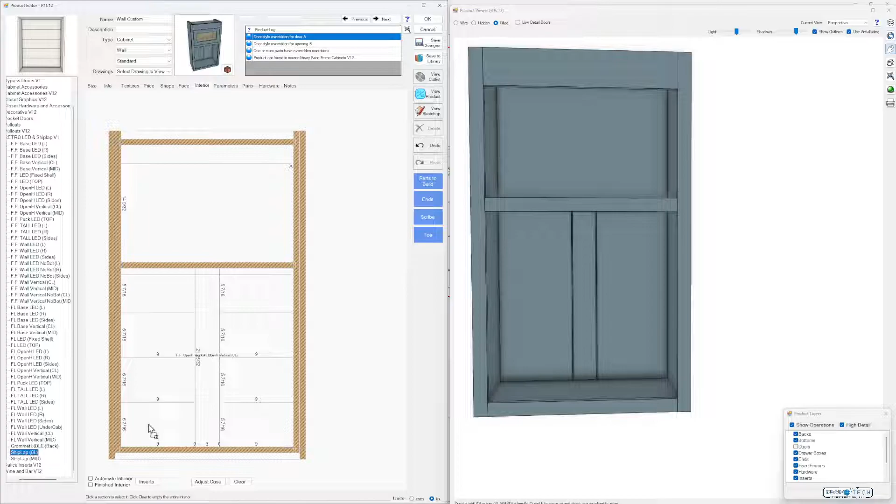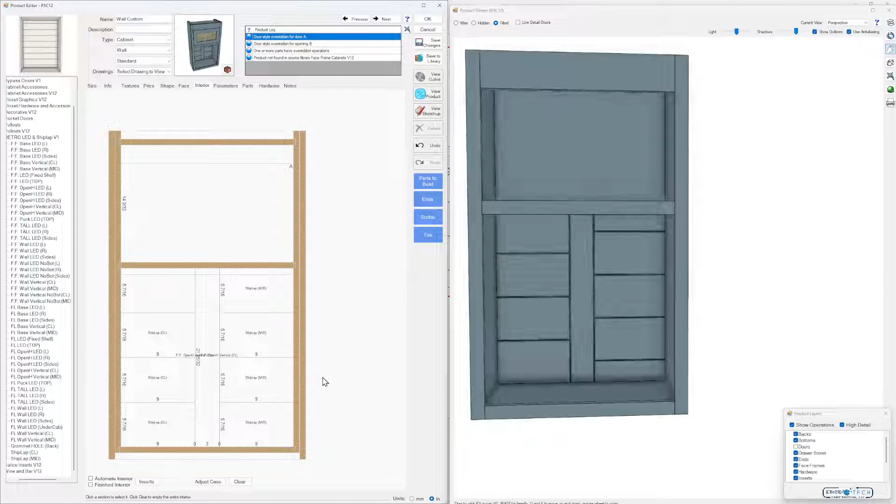That'll drop it on the line there. Let's do that for now. Drop it in the bottom. Drop it in the bottom. And that's it. We don't want any grooves higher than that. And again, I'll just do it on the mid for this side to see the difference. Mid. Shiplap mid. The shiplap acts as an opening width operation. And there it is. So you can get creative with that.

And one thing to note too is this says 3 inches here, but these grooves are going off the center line, so it's going to be an 1/8 inch less than that. So keep that in mind if you're trying to get specific sizes. You see that's 2 7/8. So if I go across to the other side, it's going to be 3 inch on center.

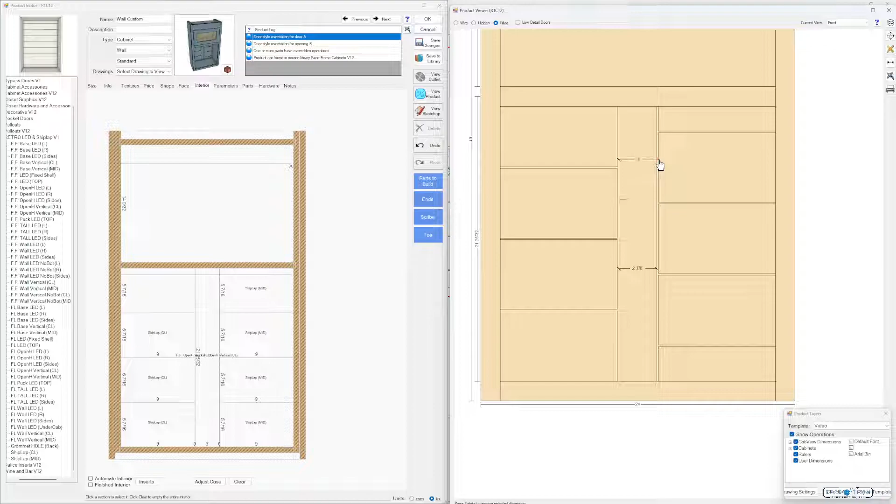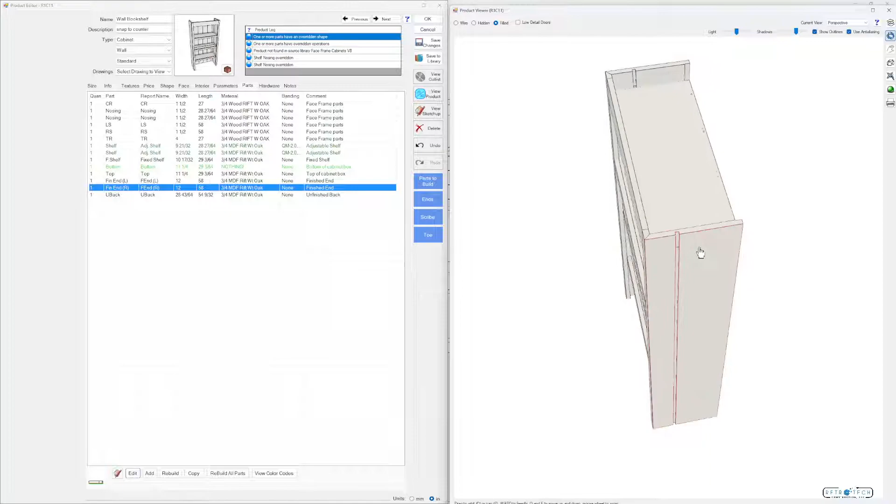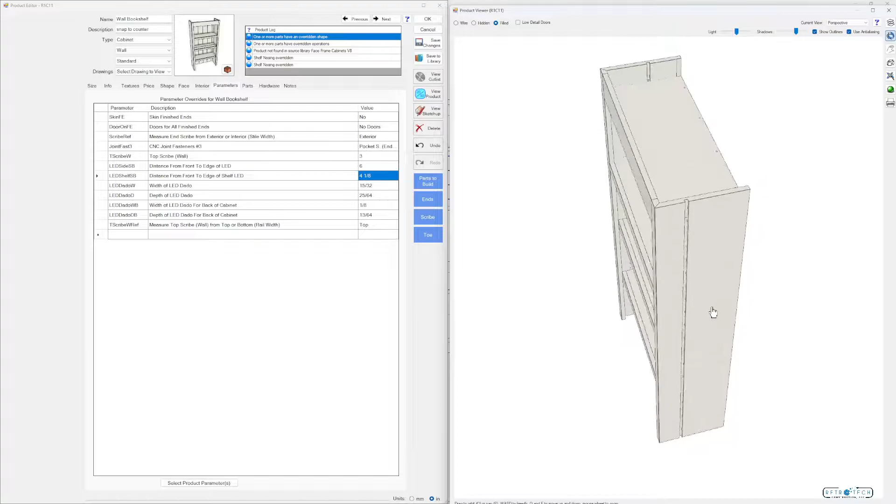So one quick thing I want to mention before I head out: if you want to move an operation to the opposite side, go to your part, operation, whichever groove it is, there it is. Right click it and move to opposite face. I don't recommend doing this until you're basically ready to cut the job, because this will not move like the rest. If I try to move my edge to, let's say, 6, see how that one moved and this one didn't. So operations that are changed like that won't update, and maybe that'll change in the future, but as of now you can see how that works.